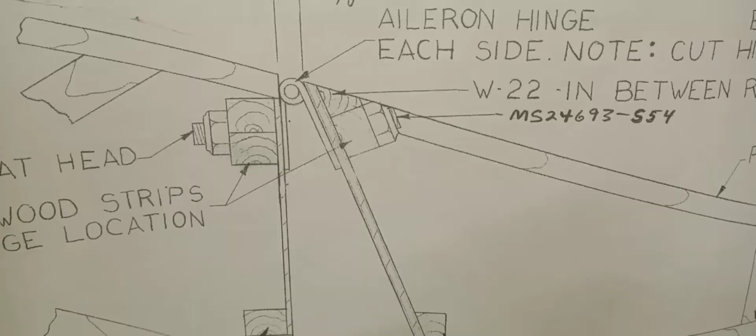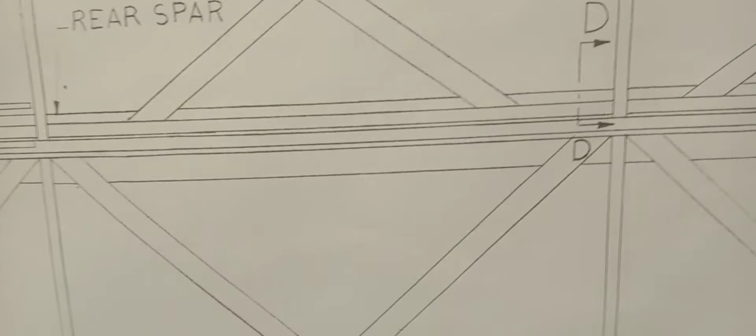Here's another one of those frustrating things that you run into. And as far as aviation blueprints go, these are not bad. I've seen worse. But they all seem to have anomalies, like their triangle piece, it's right at the top of the wing, even with the ribs, right? But then they show you here that the geodetic glues up on top of it. Well, you can't glue it up on top of it. Your geodetic's going to be up in your wind stream, and your fabric's going to be all bulged up there.

So on my last wing, I glued this down below the rib, or about halfway down the rib, so I had room to put the geodetic on. But then once you do that, now you have to build up between it a bar, because you have to fabric it. This here has to be smooth and even all the way across. So yeah, you can put the geodetic up on top here, but now you've got to fill this whole space evenly so that you can fabric it straight across, nice and even.

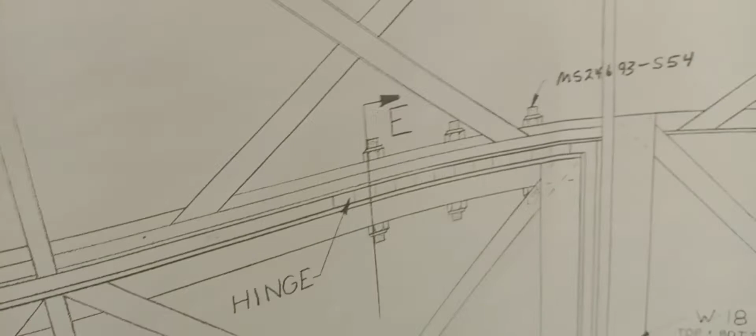And so what I'm going to do is I'll glue the geodetic under it, and where the hinges go, I'll probably just start the hinge just inside, right in here somewhere. The print calls for them right at the very edge. I'll move it in a little bit so my geodetic can come up in the corner. And the blocking, because that's where you put this extra block right here. So well, I suppose you could put your geodetic underneath that. I don't know, we'll see whenever we get there, which is, I guess now.

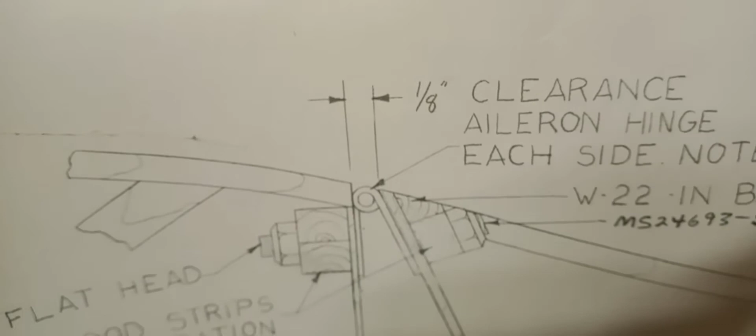Now I want to get the geodetic in next, because commercial white ash has the same modulus of elasticity as Sitka spruce. It's very strong and tough, but yet it's fairly flexible. And I did notice out at the tips of the aileron that you do get a little bit of flex. You can grab it and move it up and down.

So what I've done is I've taken a piece of geodetic and run it from somewhere up in here diagonally down across that, down to the far corner. And that just seems to be just enough to stiffen it up. But I do that after I get all the crisscross geodetics put in.

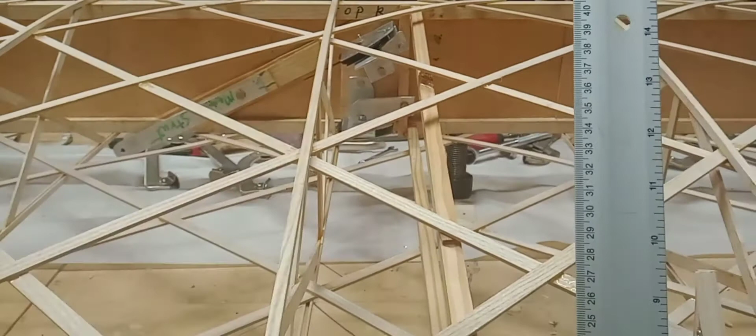And of course we'll block it in the entire way around. This here will get blocked in, and we'll use the slots too. And that's what the aileron horn will connect to. And let's sight down that, see if it looks about right. Actually, that might not look all that right. Yeah, I'll put a square on the main spar, and sight it back here, run it back this way, make sure it's straight back.

So the reason it's like a hit and miss on a bunch of stuff is just because of clamping. So I've got all these clamps here. I've got my long clamps that I use for the 1 inch stiffeners, all down there. Otherwise I'd have kept going with stiffeners right here. Can't really cut this to shape.

I want to make the wingtip bow, and the wingtip bow's over in the middle of the wing rib bench. So I'll have to notch that off, cut this off, and then build up that section right there that the wingtip bow connects to. So a bunch of stuff coming up, and basically waiting on things to dry so we can move clamps.

Well, this one here, I'll just notch that out and put about a 3/4 inch piece. I'll just glue it onto it and then notch that out. And that'll reinforce it enough and get it back so we can line it up. I think that should be plenty big enough. This one here needed shimmed up on the front there. So it's the first one. All the rest of them I had to shave a little bit off of to get these to fit snug. So they're coming out pretty close though.

So that's about half of the false ribs in, and tomorrow I'll glue them up and work on the geodetic on the aileron back there, and then I'll grab these clamps from over here and start on the outboard side to get the reinforcement 1 inch stiffeners out there, and the 1 inch stiffeners on the aileron right there, and then out at the end. And here we go.